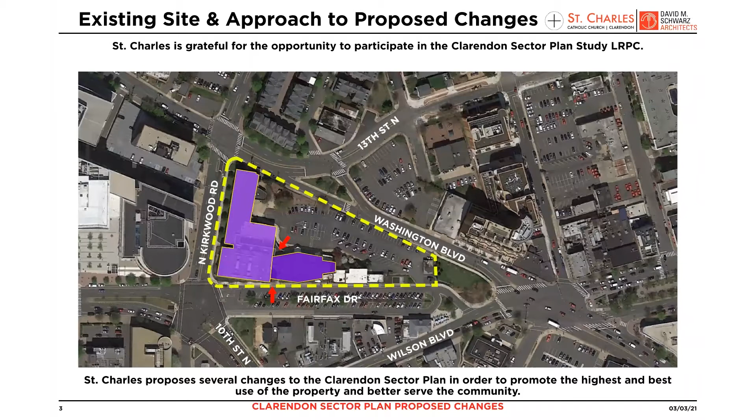There are 2 primary entrances located between the church and the parish center, the 2 buildings shaded in purple. The street entrance is located along Fairfax Drive, and a second entrance is located off of the parking lot.

This plan shows the emerging concept for the redevelopment of the church's property. A new St. Charles Church, shown in dark purple, would be located at the eastern portion of the site, with the front of the church oriented toward the heart of Clarendon.

Moving to the left, a new parish center, shown in lighter purple, would support ongoing church programs. It adjoins one side of the new church and takes advantage of the increasing width of the site as it extends to the west. The western half of the site, shown in tan, is reserved for the church's development partner.

Located at the widest part of the site, it allows for an efficient building layout, as well as responding to the Clarendon sector plan allowance for additional height on this portion of the site.

All parking is located below grade and accessed from Washington Boulevard and North Kirkwood Road. A series of courtyards are interspersed between the various building elements to provide light, air, and views, as well as access to semi-private outdoor space.

The plan also shows a preliminary concept of how Fairfax Drive might be redeveloped into a more pedestrian-friendly area that accommodates the needs of the community, as well as providing vehicular access to the adjoining properties.

We look forward to coordinating with the county in their design of the reconfiguration of this street.

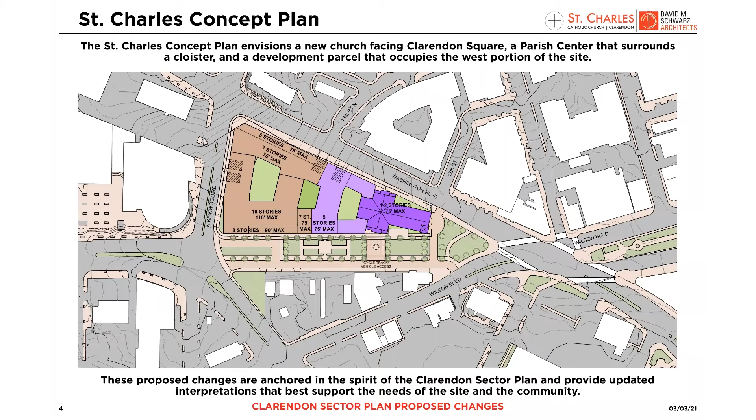We've made a number of recommendations for the update to the sector plan, but we will focus today primarily on the height and massing requirements.

The diagram on the left illustrates the current sector plan's 1-to-3 taper requirement that applies to building heights greater than 75 feet located across from the residential area to the north.

The requirement calls for the taper angle to start at the center of Washington Boulevard, the red dashed line. Extending the taper line through the site results in a very small, inefficiently sized portion of the building, the dark upper shading, that could actually be built to a height of 90 feet.

It would be highly impractical to build such a small area.

Looking at that same diagram, the dashed blue line begins at the sidewalk in front of the townhouses along Washington Boulevard. It illustrates how the building heights already permitted along Washington Boulevard provide sufficient height to mask the view of the additional permitted height further into the site.

This makes the 1-to-3 taper requirement largely unnecessary.

The diagram on the right proposes an alternate method for determining the setback of taller portions of the building visible from Washington Boulevard.

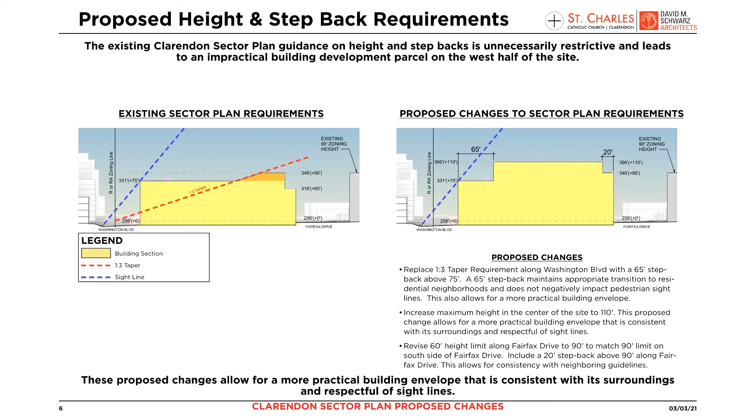This is accomplished with a 65-foot setback above a height of 75 feet that will minimize the visibility of higher portions of the building from the adjacent residential community.

Recommendations for updates to the sector plan provide an opportunity to incorporate a more practical building height at the center of the site.

As the massing illustration on the left shows, the maximum height at the western portion of the church's property is currently 90 feet. The illustration on the right shows a recommendation to increase this to 110 feet. We believe this height change is consistent with other allowable heights in the vicinity and can be accommodated with minimal visual impact to the surrounding community.

As shown on the building heights permitted on nearby blocks, a height of 110 feet is in keeping with height limits on the south side of the site, as well as to the west on the opposite corner of Fairfax Drive, where 110 feet is permitted at the edge of the Virginia Square sector plan. The existing 75-foot height along Washington Boulevard would still be maintained, commensurate with existing and planned development at the opposite corner of Washington and Kirkwood.

This additional height is mitigated by a more practical approach to the setback guidelines presented on the previous slide. There is a 10 to 20 foot drop in grade at the west end of the church's site, so the visual impact of the building's height when viewed from the heart of Clarendon will be lessened.

Lastly, in the current construction market, it is unlikely that a building would be built to a height of 90 feet, given that less costly wood frame construction can be built by code to a height of 85 feet. Allowing for a height of up to 110 feet provides the option to change to a higher quality Type 1 construction.

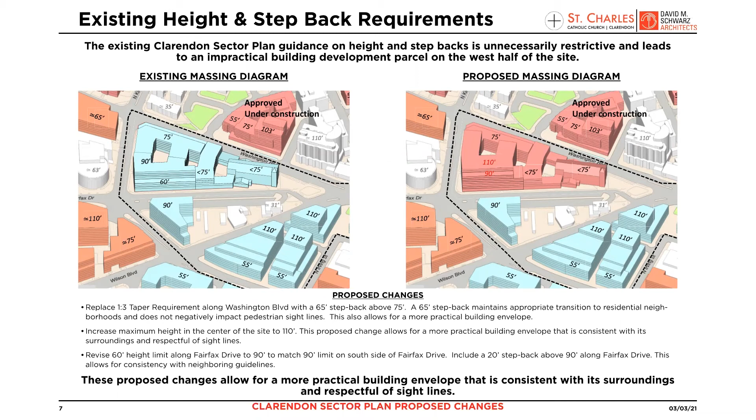This massing illustration of the proposed redeveloped church property shows the west end of the site built to a height of 90 feet. This next illustration increases the maximum height from 90 feet to 110 feet over a portion of the site, effectively allowing for 2 additional floors.

The 110-foot height falls behind the proposed setback line along Washington Boulevard, and a setback above 90 feet would also be provided along Fairfax Drive.

Moving to the opposite end of the block, this pair of views look east along Washington Boulevard, just west of the Kirkwood Road intersection, comparing the existing heights and taper requirements shown on the left to the proposed height and modified setback of the upper floors on the right.

As can be seen in the right image, only a very small portion of the upper floors are visible, and these will be completely hidden by the lower building once the viewer crosses the Kirkwood Road intersection.

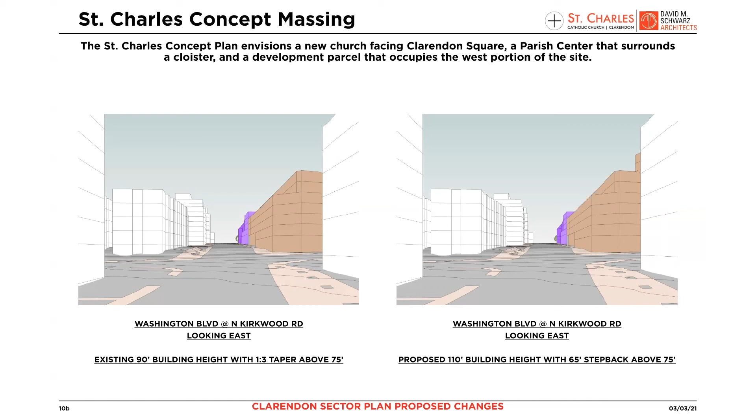The sector plan currently requires buildings along Fairfax Drive to set back above a height of 60 feet. This setback does not appear to respond to a corresponding setback requirement or building height limit on the immediate adjacent blocks. Specifically, on the opposite side of Fairfax Drive, a building can extend to a height of 90 feet with no setback.

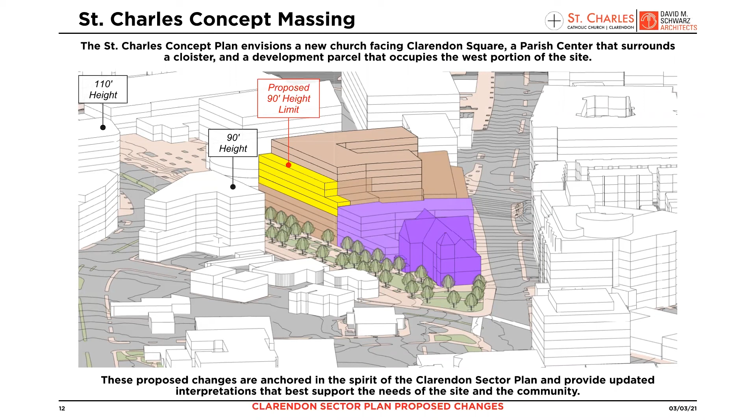We believe it is consistent and reasonable to allow buildings on this portion of the church property to similarly extend up to a height of 90 feet before setting back, matching the allowed height on the south side of Fairfax Drive. This sketch view, taken from Kirkwood and Fairfax Drive looking east, illustrates a 90-foot height extending all the way out to Fairfax Drive.

We are also depicting landscape improvements to Fairfax Drive and showing green space on the triangular site on the opposite block in lieu of a building, something the county is considering.

We would not recommend a building setback at the 60-foot height, as this would result in an awkward building proportion, made all the more evident by the long sight lines afforded by the extra width of Fairfax Drive.

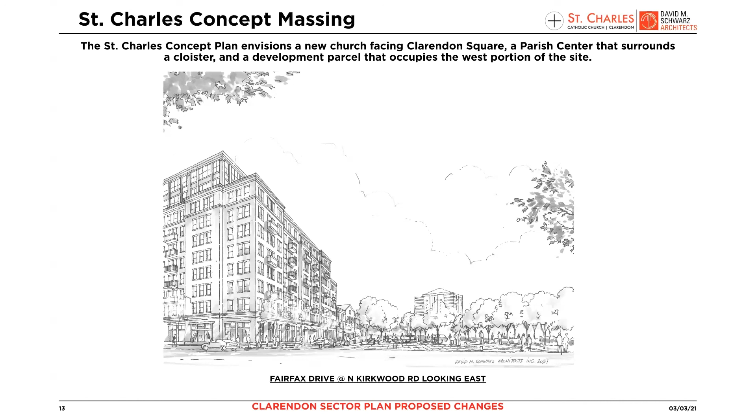A good pedestrian experience along this part of the site will be best achieved with a building design that vertically expresses a distinct base, middle, and top, has bay elements that create ins and outs along its length, and provides hierarchy and visual interest. Most importantly, it needs a well-detailed and articulated first floor where the building most directly comes in contact with the public.

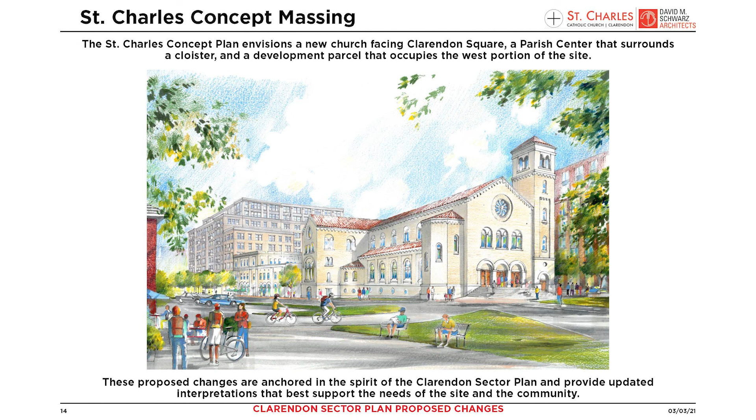In closing, the conceptual sketch shown here is of the new St. Charles Borromeo, with its front door facing the heart of Clarendon, the parish center beyond, and transitioning to the development partner's new project anchoring the western portion of the site. Thank you for your time.